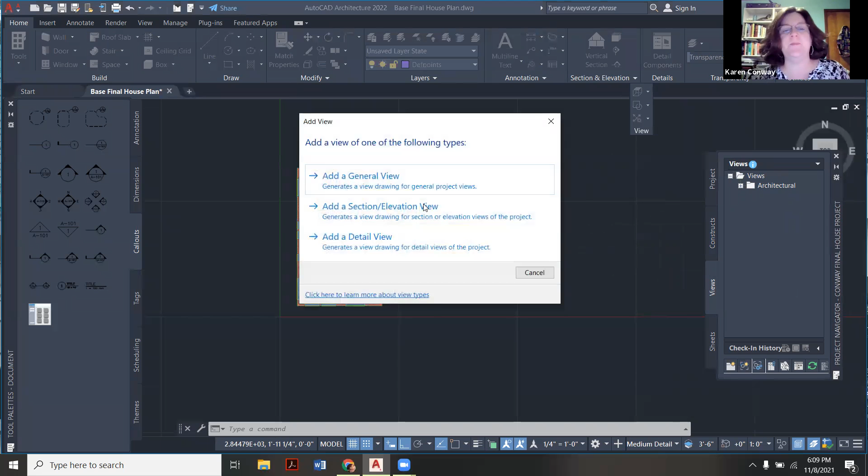My final house project is open right here. So I'm going to go to the View tab, go the second button to the right, add a view, and choose add a general view. I'm going to call it house floor plan. Say next, and it's first floor. Say next again, and I'm going to unclick at the top and click the bottom one there, and say finish. That should be setting up right there.

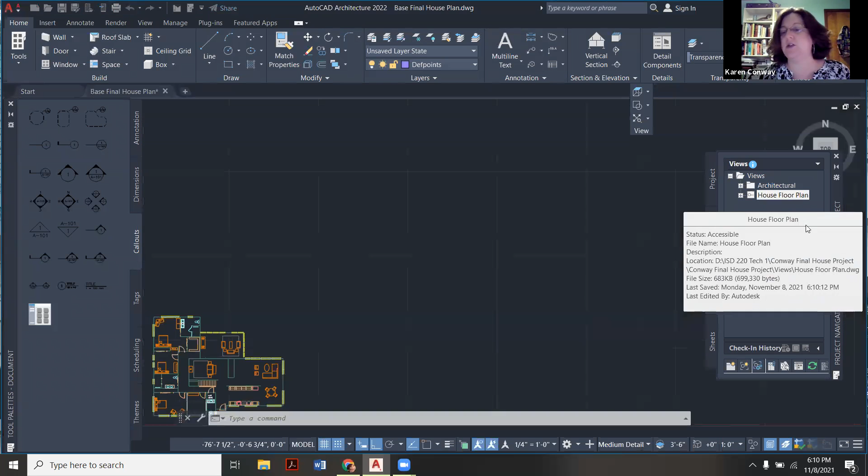I'm going to open that up. One of the things, before you do this, if you haven't done it yet, under my base plan, the scale down here should be 1/4 inch. If you haven't done that, we'll change it over here. But here's the view, house floor plan. Right now I'm going to reload. Let's see, and I'm going to click OK. I don't think much changed, but it came in at an eighth of an inch, so I'm going to change that to 1/4 inch.

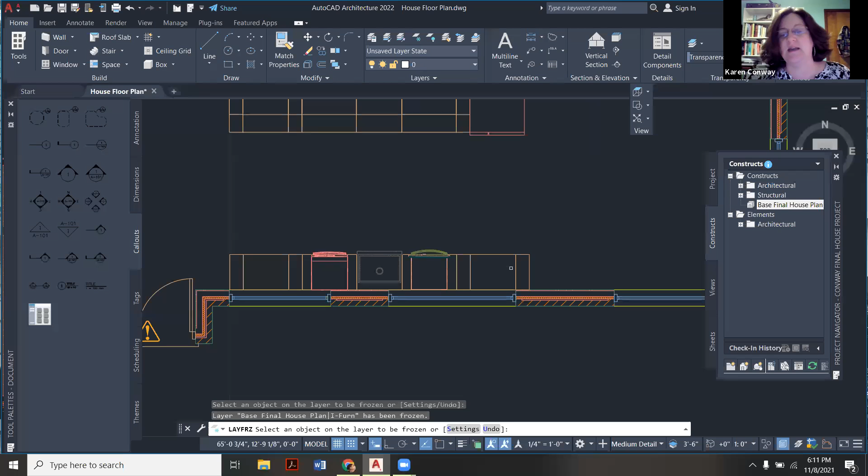Now for this part of the project, for the first sheet, which is going to be the floor plan, we're not going to see the furniture. So you're going to go over here to the layer where it looks like a piece of paper and a little snowflake, where it says freeze, and left click on that. Then I'm going to left click on the furniture, and most of my furniture should disappear. I do want all my bathroom stuff, and I want my countertop — in this house, that's the kitchen and the appliances — I want to be able to see that. In my case, this old project had an outline of carpet, so I'm going to hide that too. Otherwise, most of this is pretty well set to go. You can see I'm missing some stuff just because it's an unfinished one.

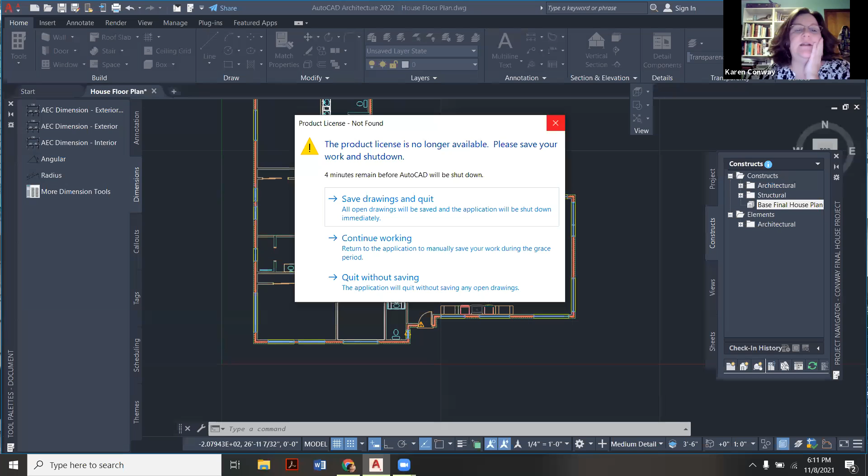This is where you're going to start adding your dimensions. In my case, my tool palette is already on document, but if it's not, you can right click it, and instead of design, you want document. For dimensions, we're going to check this license soon — we're going to go to more dimension tools. Click here, then click over, it should be opening in a second. We want to add the linear one, so add that to the tool palette. I'm going to click that again because another one we want to make sure to add is the aligned one — add to tool palette too, that way if we need to do any diagonals, though most of you will be using these linear ones.

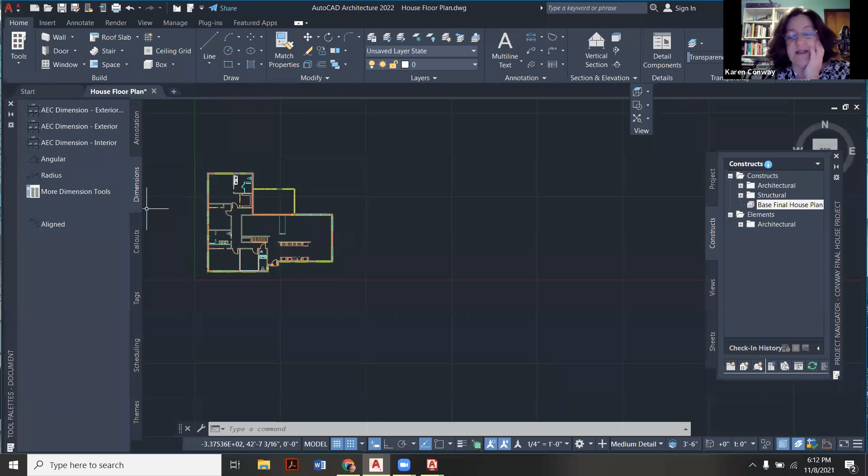We're going to follow the same pattern we did for our first house project. You're going to do the rooms, the thickness of the walls — like here would be the closet, thickness of the walls, the room — kind of continue down. Then to the left of that, on the outside, it's going to be an overall measurement. We can also choose, if we're going to do windows or doors too, we can get into that on a third level. For my sake, for this project, I'm fine if you do just room, thickness of the walls, room — that'll be your dimensions here, and then the overall on this side. This house here had a porch, so we'll deal with that a little bit differently, but that's what you'll be doing.

We're starting to work on this Thursday in class, or like I said, if you want to start now, get a little bit ahead of the game. For this view, the house floor plan, we're going to dimension it, and we're also going to put room names in, and then we'll also have a title mark, and then this guy will be basically done. In class, I'll walk us through setting up the furniture plan, but it's the same thing — just your drawing — and then you're all set. You're going to have a furniture plan, a little title mark, and then you're good to go.